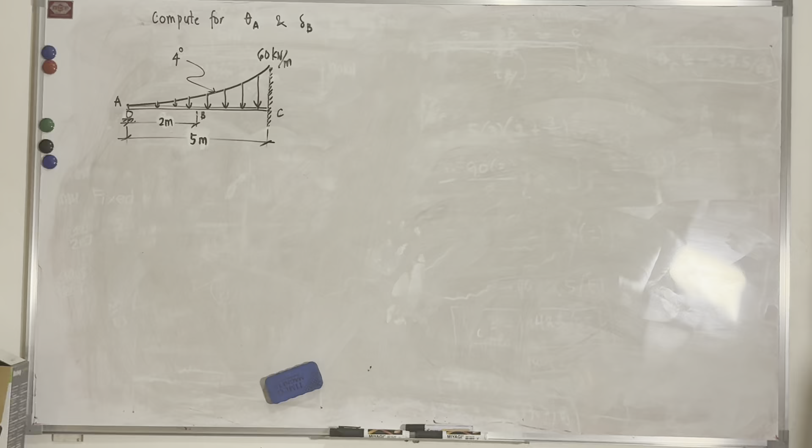Okay, so for today's video, pag-uusapan natin ang pagkuha ng beam deflection using the indeterminate beam. So for this problem, meron tayong prop beam. And ang gagamitin nating method again is using the area moment method.

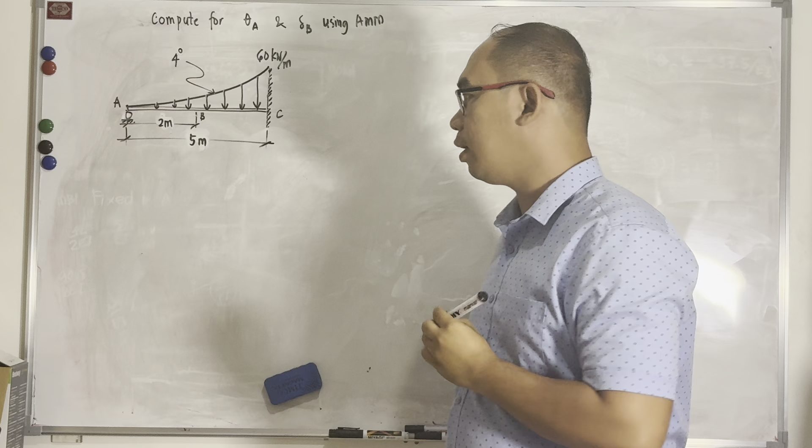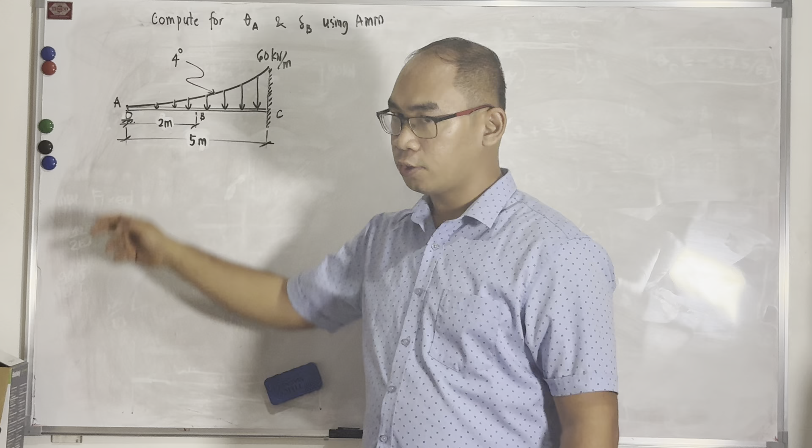Okay, so for the first and second step ng ating area moment method ay i-draw ang moment diagram by parts at ang elastic curve. So para madraw ang moment diagram by parts, meron tayong point A, B, at C. Yung point B ay 2 meters from point A at meron tayong total length na 5 meters. Then meron tayong load na 60 kN per meter.

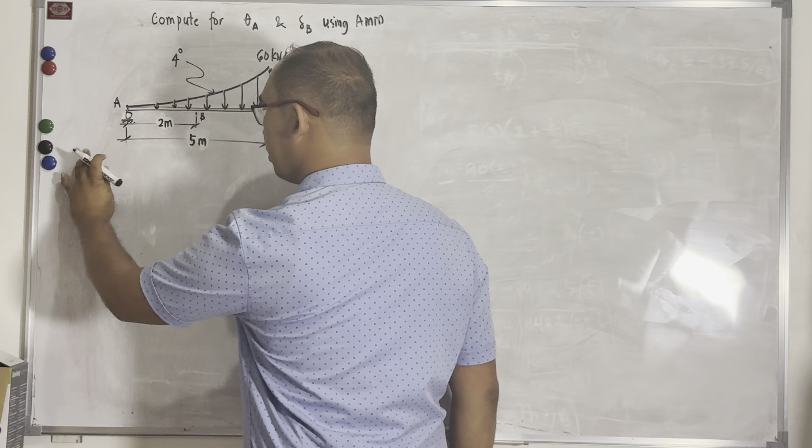So dito kung magmo-moment diagram by parts tayo, mas prefer natin na mag-fixed at C. So kapag tayo ay mag-moment diagram by parts, kung mag-fix tayo kay C, meron tayo ditong reaction sa A. Okay, so RA, tapos magmu-multiply yan ngayon sa 5, so magiging 5RA.

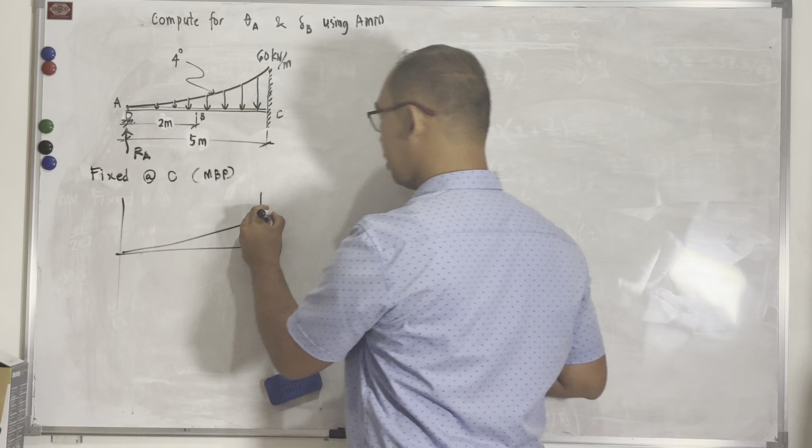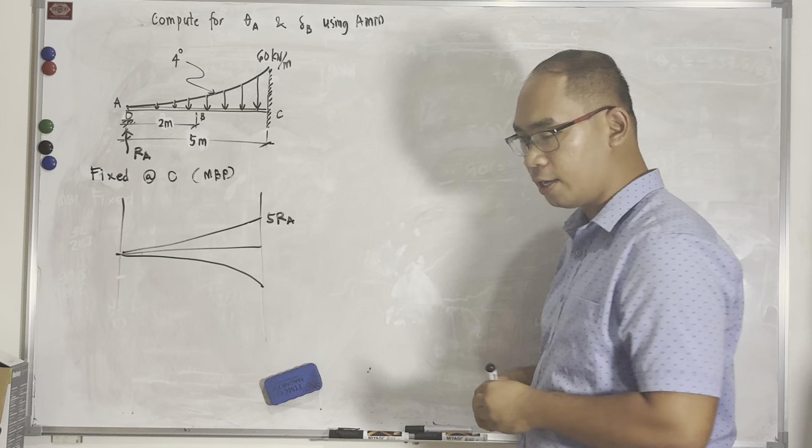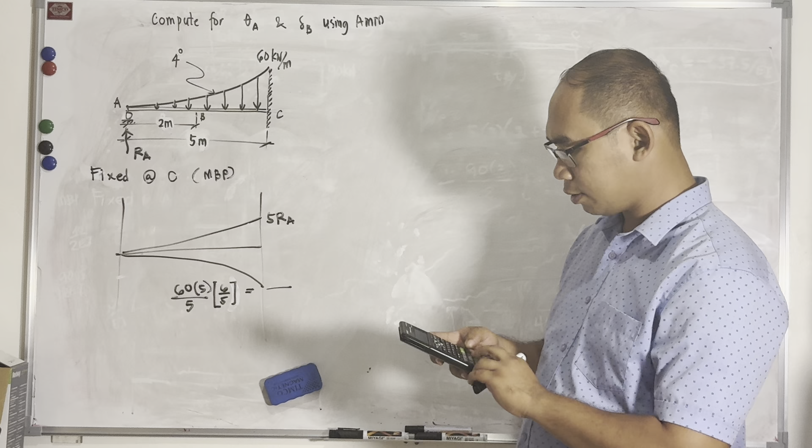Okay, the next is yung ating spandrel. I-moment natin yung spandrel. So to take the moment at the spandrel, that is 60 times 5. Sulat ko lang dito. Para ma-compute to, that is 60 times 5 over ilan? Dahil 4th degree yan, so over 5 na to. Tapos ang centroid niyan ay 1/6 ng 5 or 6 over 5. Okay, so yung lalabas po ditong value ay yun na po yung magiging value ng intensity dito sa ating spandrel. So this is 60 times 6 na lang over 5, so magka-cancel na to, so this becomes 72.

Over EI. Ito rin 5RA over EI. Okay, so ito na yan. So ang value dito ay 5RA, dito naman ay 72. Okay, so anong degree na ito? So 4th degree yon plus 2 tayo, so this becomes 6th degree.

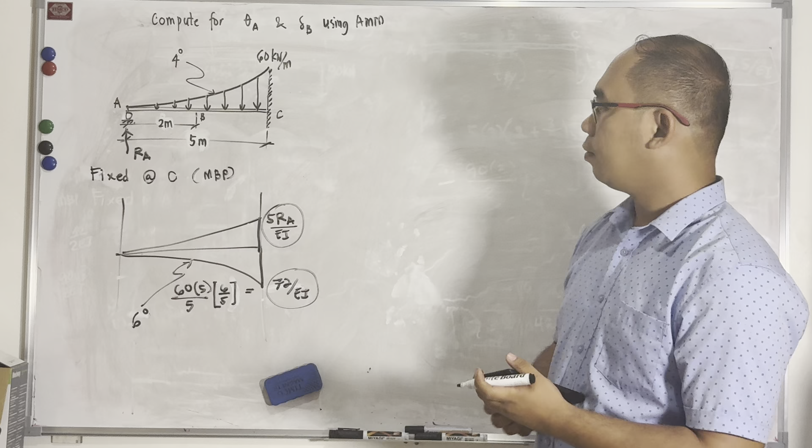Okay, so from that we are required to draw the elastic curve. So paano natin masolve yung ating elastic curve? Kung ito ay roller tapos doon ay fix, so expected natin ang elastic curve niya ay pababa agad to dahil roller yan, tapos dito ay magiging straight ang theta C.

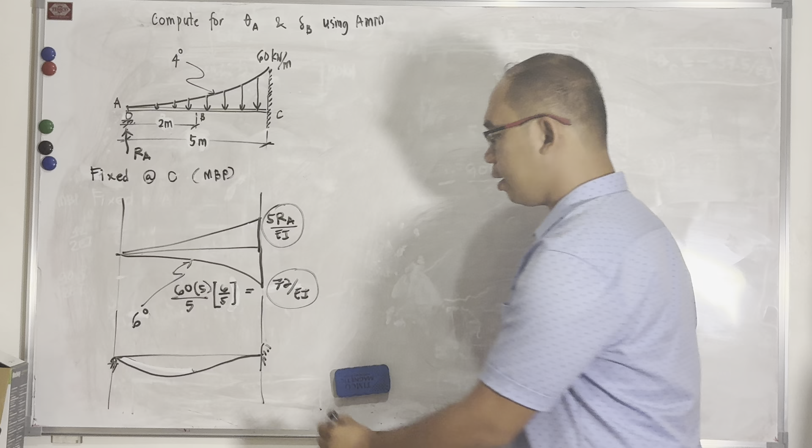So C, sorry. Okay, so from that, para ma-solve natin ang rotation, dapat meron tayong isang alam na value ng rotation, yun ay ang rotation sa point C, which is equal to 0. So pag magtuturo tayo dyan, para ma-solve natin yung rotation sa A, mag C to A tayo. So final minus initial: final rotation na A minus rotation sa C is equal to area ng A to C.

So rotation sa A minus rotation sa C, or same lang naman kung rotation sa C to A, same lang yan. Okay, so rotation sa A is unknown minus rotation sa C is 0. Ano naman yung area naman po ng ating C to A? So ang area nito, triangle, 5 times 5RA. Pero hindi pa natin mako-compute yung ating over 2. So may unknown pa pala tayo. So mamaya balikan natin yan.

Mamaya alamin muna natin yung value ng RA. So 5 times 5RA minus area naman ng ating spandrel. Kung ito ay 6 degree, ang area niyan ay 1/7, so 6 yan, so over 7 na to. 1/7 ng 5 times 72. Tapos ang centroid naman po niyan ay ilan? 1/8 or 7/8? Wala pa palang centroid, sorry, so area lang pala ang pinag-compute. So dito kung mapapansin nyo, may 2 unknown tayo, may theta A at saka RA. So wala tayong mako-compute, mamaya balikan natin tong equation natin.

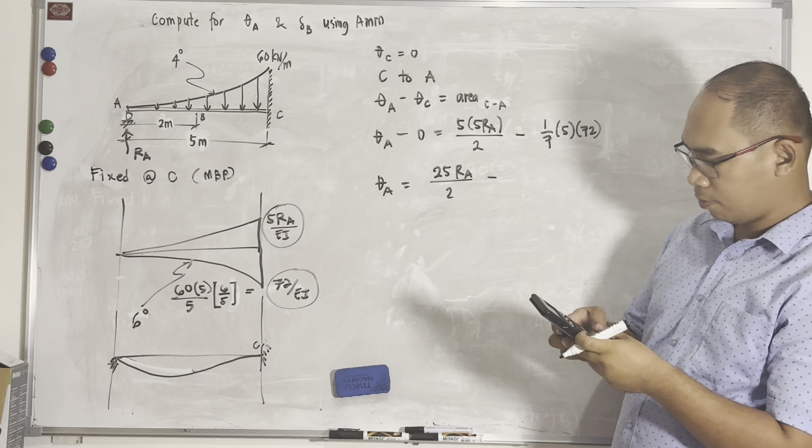Simplify na lang muna natin. Theta A is equal to 25RA over 2 minus 72 times 5, 360 over 7. Okay, so let muna natin ilagay yan kasi wala pala tayo masusunod. Pero ano ba yung pwede nating makuha dito sa working equation natin? Gawa nga tayo ng tangent line kay C.

Okay, kung gumawa tayo ng tangent line kay C, zero yung magiging value ng tangential deviation natin ngayon ng C relative to A, or tangential deviation ng A natin relative to C. Pagka nagtangent tayo kay C, tangential deviation ng A relative to C. Mag-tangent tayo kay, reference natin is si C, reference. Dito tayo magmo-moment mamaya. So maglagay tayo ng tangent line kay C, papunta kay A.

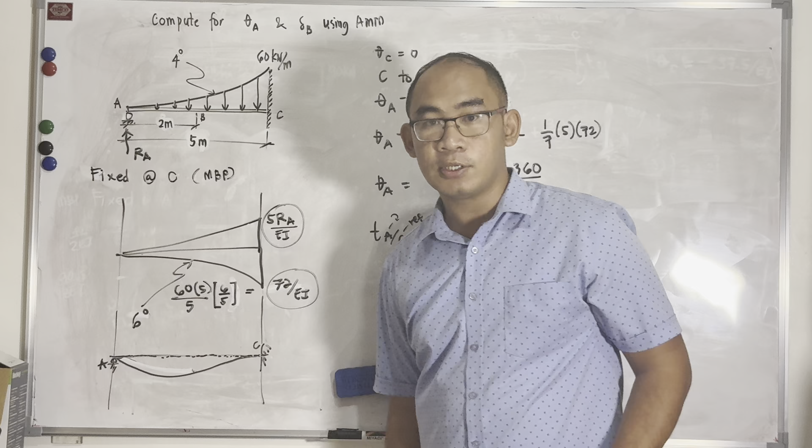Ngayon, may nakuha ba tayong value ng tangential deviation? Di ba, 0 lang naman, kasi tumapat lang rin mismo sa support yung value niya. So therefore, the tangential deviation at A relative to C is equal to 0 lang po. Okay, so from that, we are going to take the moment at point A. This is point A, and this is point C. Tapos reference natin ay C. Okay, so area, so 5RA.

So ito na po yung working equation natin: 5RA times 5, hindi ko na muna ilagay yung EI, over 2. Ano po yung centroid nito?

Papunta sa, ang reference natin ay C. Magmo-moment tayo sa A, okay? So kumbaga ito, yung area nito, moment mo dun sa A. Tangential deviation ng A, so that is, ano po? 2/3, dahil triangle yan, 2/3 ng 5.

Okay, tapos ito naman pong spandrel, minus siya kasi sa baba. So ang area niyan ay 1/7 ng 72 times 5, over, so 6 degree yan, so over 7 na to. Tapos, dahil ang magmo-moment tayo dun sa A, so that is over 8 na to, no?

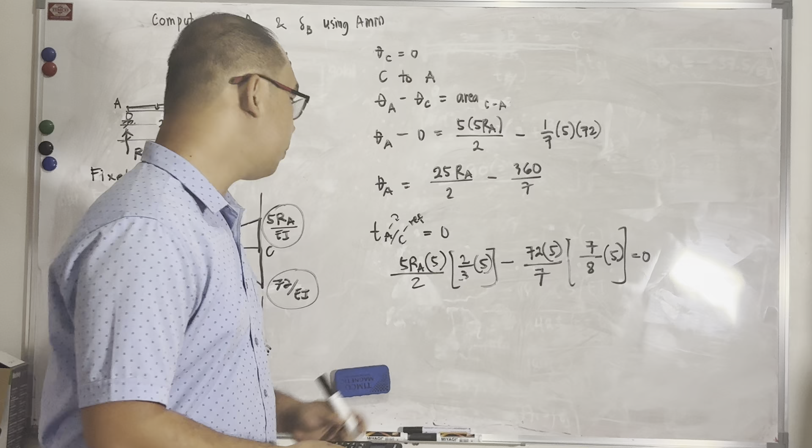Okay, so from that, masosolve na natin yung value ng ating RA. Magka-cancel lang yan. So 72 times 5 times 5 over 8. Tapos cancel na to. Over tatlong 5. Tapos times 3.

5.4, so RA is 5.4 kilonewton. Double check lang natin ha: 72 times 5 times 5 over 8, times 3 over 5 over 5. Yan, so 5.4 kilonewton, okay.

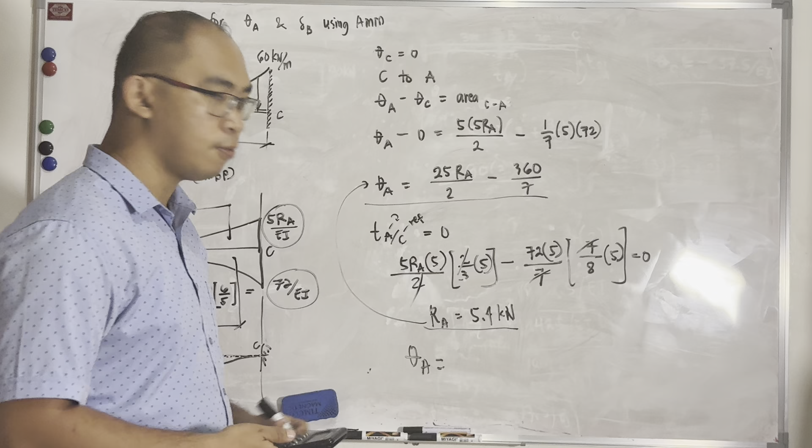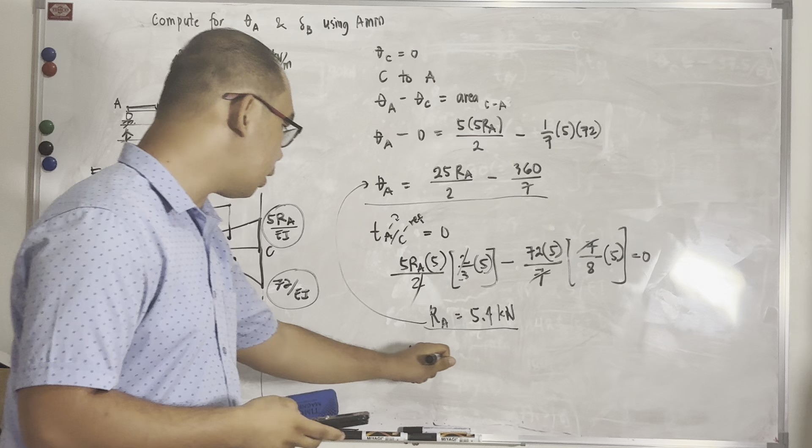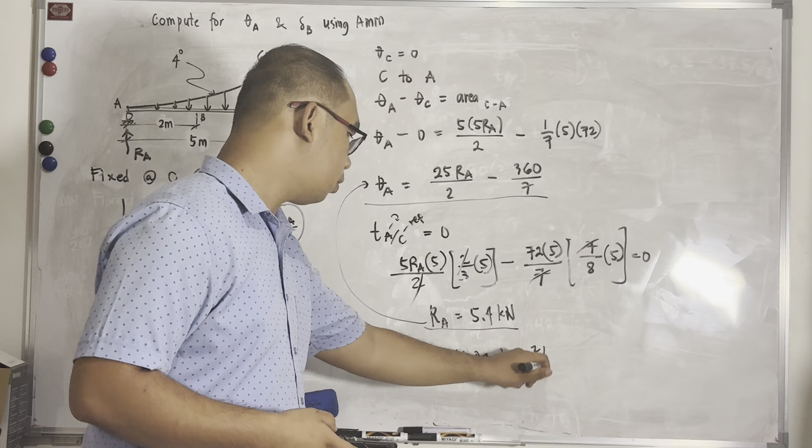So itong 5.4 kilonewton, substitute natin doon sa value ng theta A. So kung pag-substitute natin yan, makukuha na natin yung value ng theta A. So 25 times 5.4 over 2 minus 360 over 7. So theta is 16.07 kilonewton meters squared over EI. So this is now the value of theta A, 16.07.

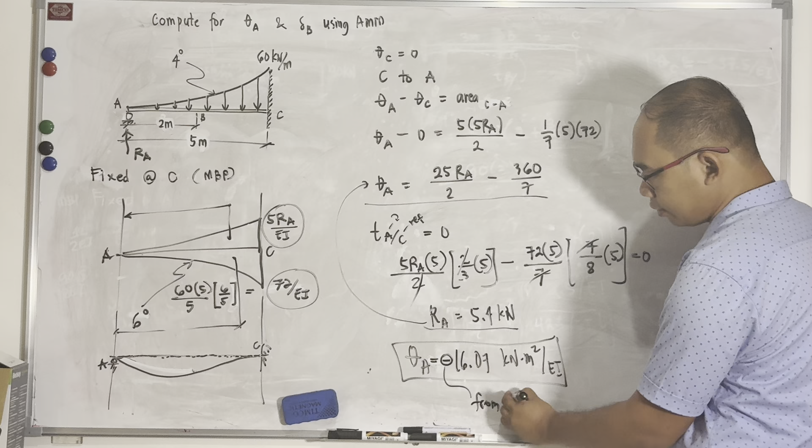Check natin yung elastic curve. So from the original position, magbe-bend siya pa ganyan. So this is in clockwise direction. So dahil clockwise yan, we have to take note na yan po ay magiging negative value, para pag nag-compute tayo ng mga theta B or deflection, ay magamit pa rin natin siya. So this is based from the elastic curve. Okay, so that is now the computation for the rotation po of A.

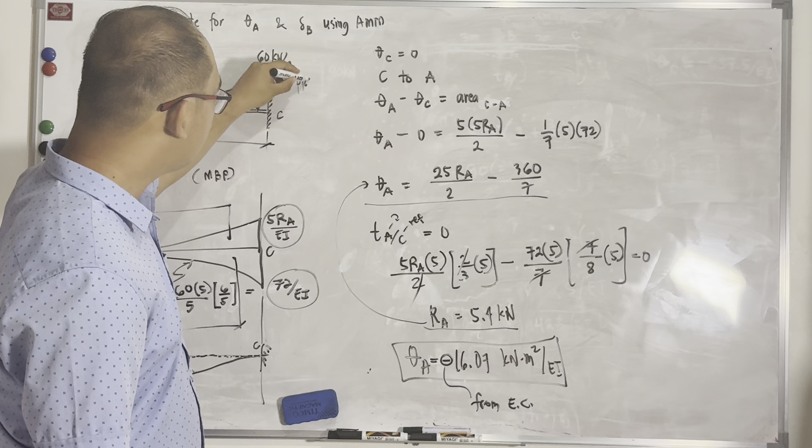No, so dapat alam natin ito. Kung magko-compute kayo ng isang prop beam, dahil alam nyo na wala kayong mako-compute hanggat hindi nyo makompute yung RA, ito muna yung laging unang isolve nyo: tangential deviation ng A relative to C, bago kayo mag-compute ng rotation at saka deflection. Kasi nga indeterminate yung ating beam, so wala tayong masosolve na rotation and deflection hanggat hindi natin nasosolve yung RA. So ang gawin muna natin ay kunin muna natin yung TAC, which is always equal yan sa 0 kapag siya ay prop beam. Prop beam po ang tawag natin dyan ha. So ganito yan, prop beam. So that is the first degree statically indeterminate.

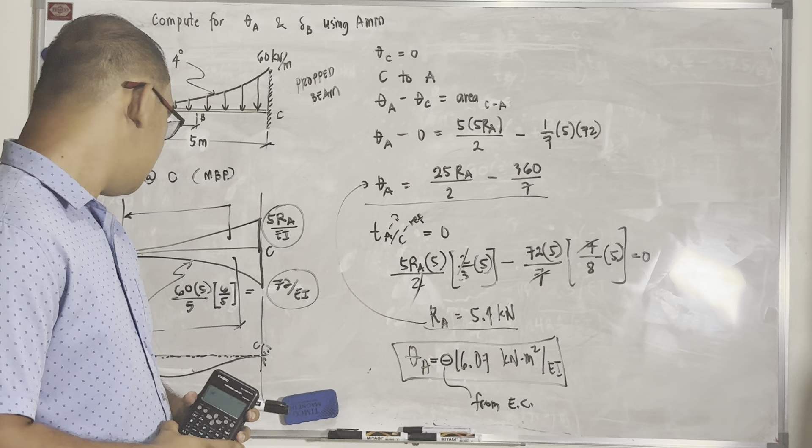Okay, for the next one naman, paano naman daw po yung deflection sa B? Okay, so sige, computein natin.

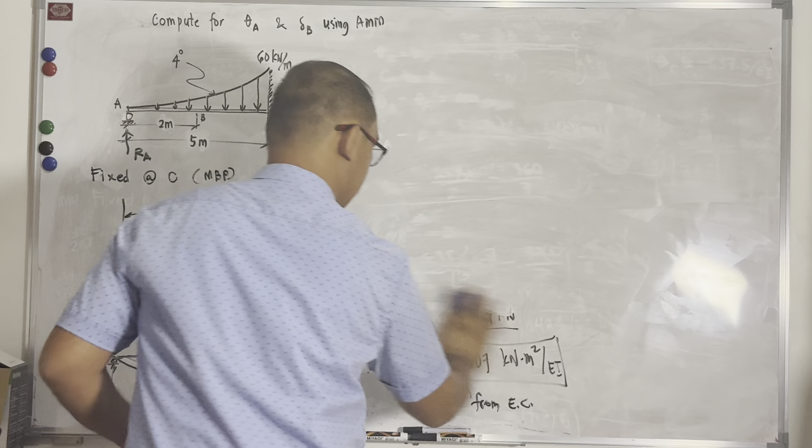Okay, so again, ang ating elastic curve ay ito, no? So, ito yung ating fix. Ito yung A, ito yung B. Ang B ay 2 meters, no? While yung total naman natin is 5 meters dito. And this is 6 degree, okay?

So dito ay magkakaroon po tayo ng kung maglagay tayo ng slope dito sa A, no? Okay, so dito ay meron tayong rotation dyan. Ilan yung na-compute natin? Rotation sa A ay 16.07. Magagamit natin yan mamaya pagka tingnan natin, no?

So meron tayo ditong deflection sa B, yung distance na yan, tapos itong distance naman na to, that is the tangential deviation ng B relative to A, no? So theta A negative. Tapos ang RA na na-compute natin kanina ay 5.4, no? Retain lang natin yung mga values na yan.

So paano tayo gagawa ng geometric relations? Okay, so to make a geometric relations, we have here tangent of theta is equal to opposite. Ang opposite natin ay deflection sa B plus tangential deviation ng B relative to A, all over 2, no? So opposite over adjacent, ito yung opposite niya.

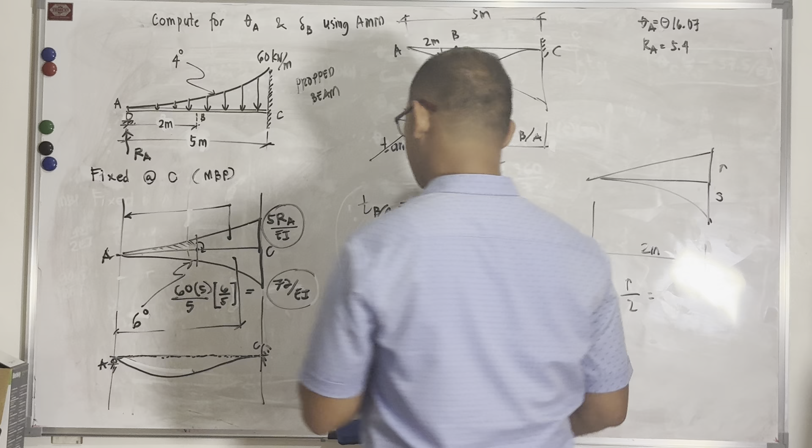So R over 2, as the big triangle, 5RA. 5RA over 5. Sabi natin ang RA natin kanina ay 5.4, so substitute natin dito. Magiging 5.4 times 2. So R is 10.8, ito ay 10.8 kilonewton per meter.

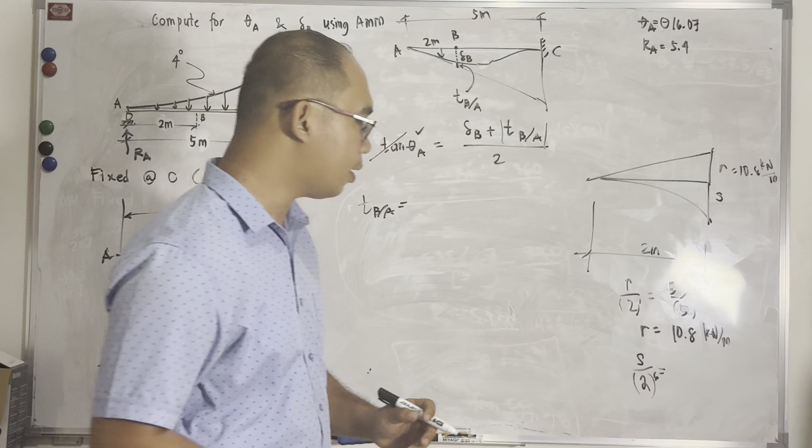How about yung S? S over 2, pero dahil siya ay 6 degree, mag-raise to 6 tayo dito. Ito, raise to 1, ganun lang rin naman. Tapos as 72 yung kabuuan, over yung total length, 5 raised to 6. So that becomes 72 times 2 raised to 6 over 5 raised to 6.

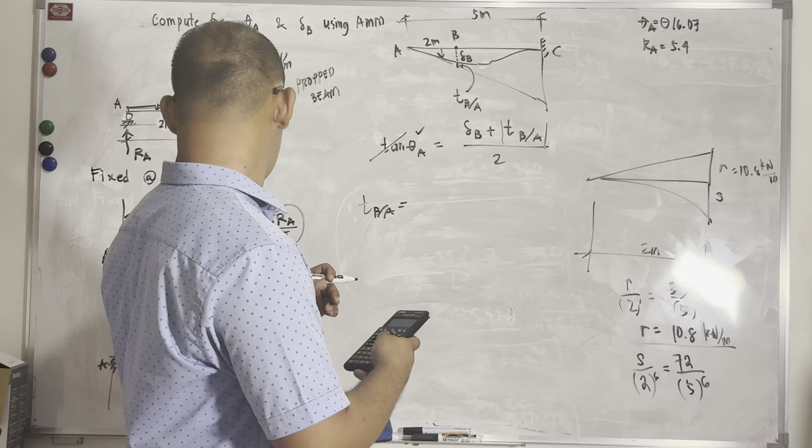So ang S natin ay, napakalit ng value ng S, 0.29 kilonewton per meter. Check lang natin ang 72 times 2 raised to 6 over 5 raised to 6. Napakaliit, no? Masyadong steep yung kanyang value. So that is now the value of S.

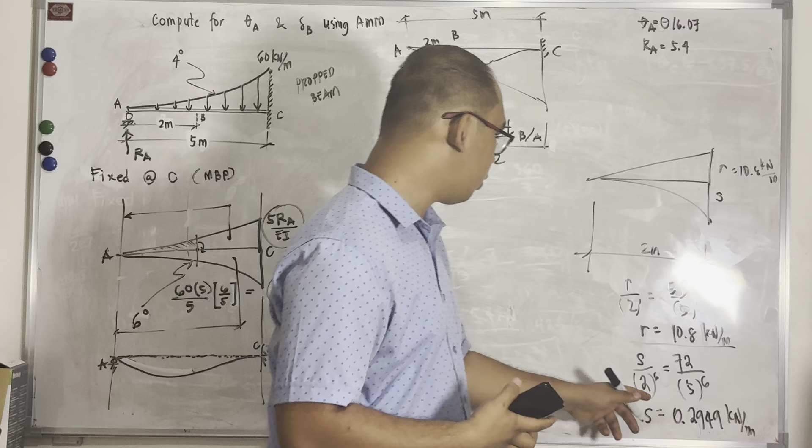Pagka tangential ng B relative to A, dito tayo mag-moment sa B. Kung kukunin natin ang moment at B, ang reference natin ay yung A. So yung area lang mula sa point A hanggang sa B, yun lang yung kukuhain natin. Area, this is R and this is S, so that is 1/2 ng 2 times R over 2. Ang centroid niyan ay 1/3 ng 2, so 2/3.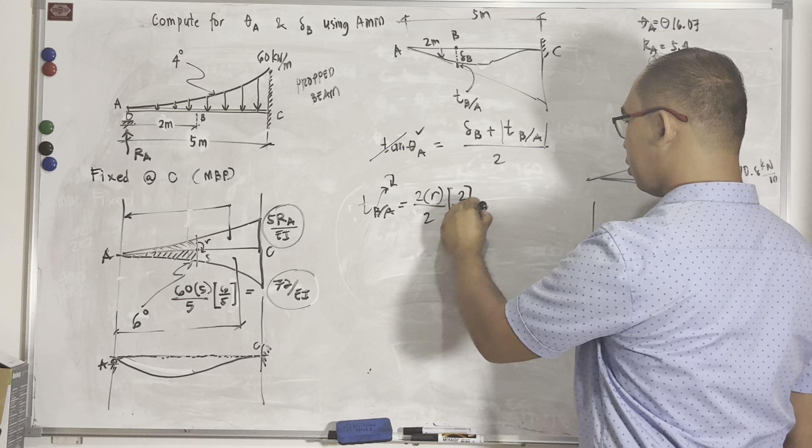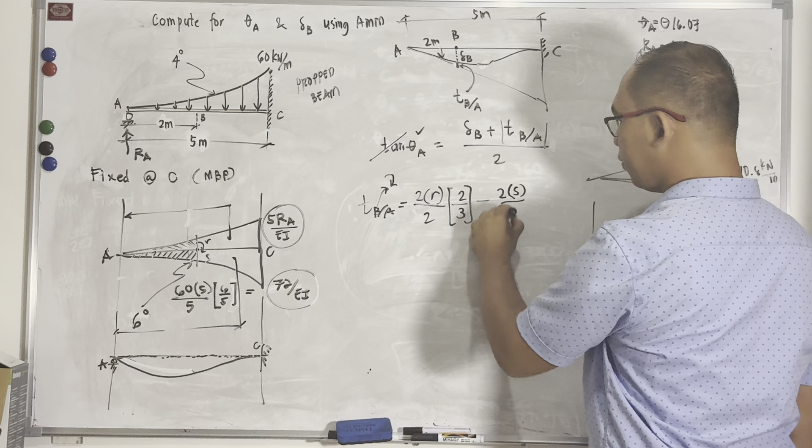Minus yung area ng spandrel sa baba, so that is S tapos 2. 2S over, dahil 6 degree yan, over 7 na po tayo. Tapos ang ating centroid papunta doon ay over 8, ng 2. 2 over 8.

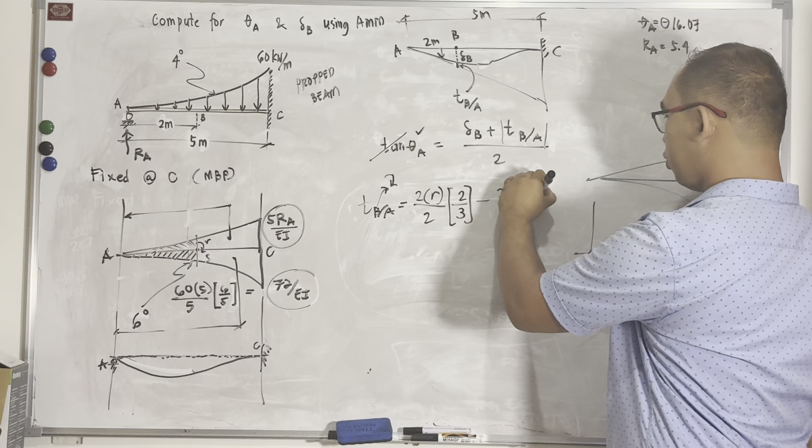Substitute lang po natin yung value ng R na 10.8 dito, tapos yung value ng S na 0.2949. So that is 2 times 10.8, cancel na ito, over 3 minus 2 times 0.2949 times 2 over 7 over 8. So tangential deviation ng B relative to A is 7.18 kilonewton cubic meter over EI.

Pero hindi yan yung sagot. Ang tinatanong ay yung ating deflection. Double check lang natin, 7.18 talaga. So for the deflection, that is the working equation. Na-solve na natin yung tangential deviation ng B relative to A.

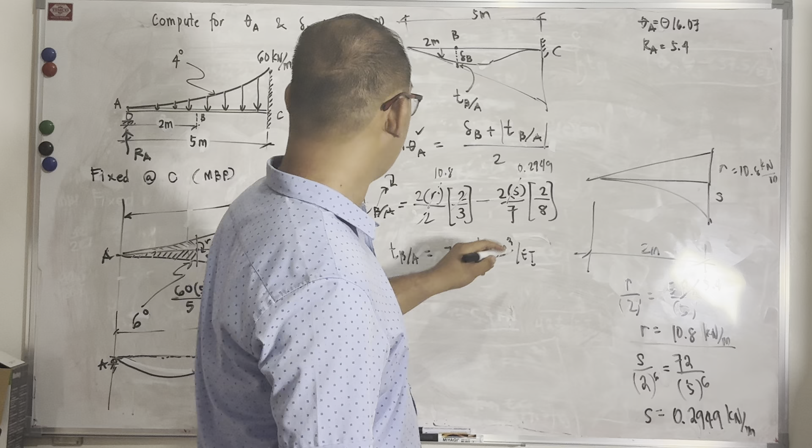Kung ang point ay above the tangent line, positive. Kung kukunin mo ang absolute value, magiging positive lang rin yan. So ang mangyayari ay negative, substitute natin dito sa working equation. Negative 16.07 is equal to deflection sa B, plus or minus. Plus siya kasi the point is above the tangent line, that is the sign convention.

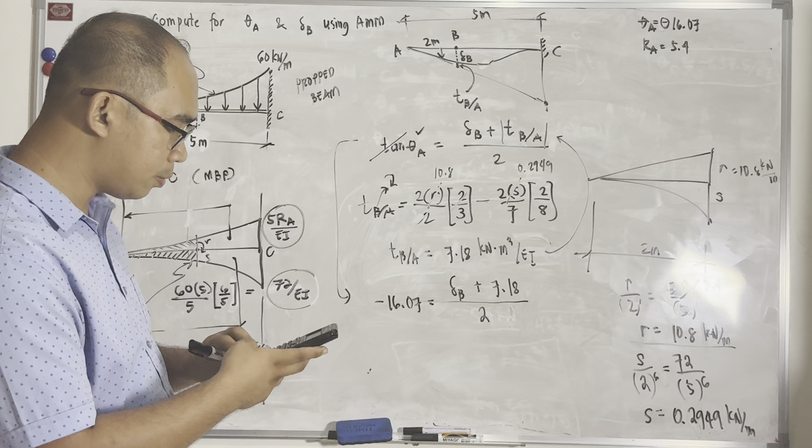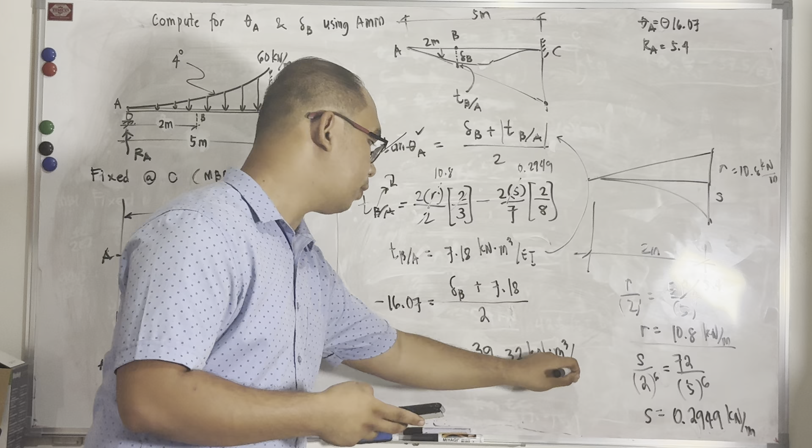Tapos ang tangential ng B relative to A is 7.18 over yung distance na 2. So negative 16.07 times 2 minus 7.18 kasi malilipat doon. So deflection sa B is negative 39.32 kilonewton cubic meter over EI. So that is now the answer for that problem.

Paano kung hinahanap ang deflection? Or you try it on your own, na locate niyo muna kung nasaan nakalocate yung maximum deflection. Solve for X max, then you can now solve for the maximum deflection.